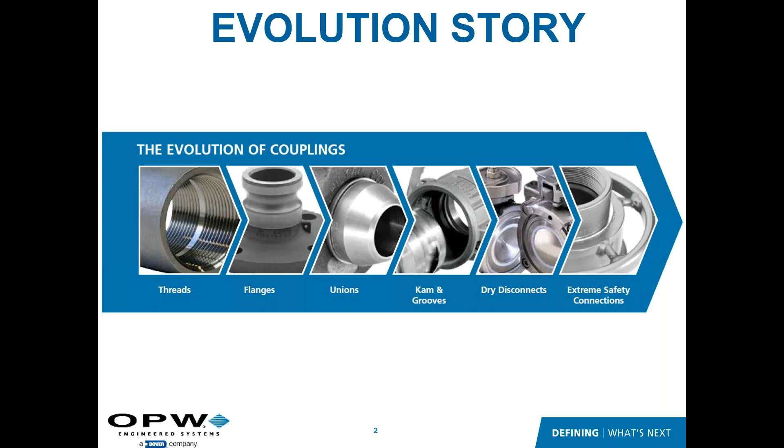So let's start at the very beginning. With threads, I mean, threads, super simple, super easy, very intuitive. Everybody knows what a thread is. It's the old righty-tighty, lefty-loosey. Used widely, these are mostly used for permanent connections, lower pressure applications. You do have torquing requirements, sealing requirements, pipe dope, Teflon tape, and things like that to get them to seal. So this really fits in where you would have a lower pressure permanent connection. But back in the day, people would literally thread up to make a connection to a tank truck or a rail car.

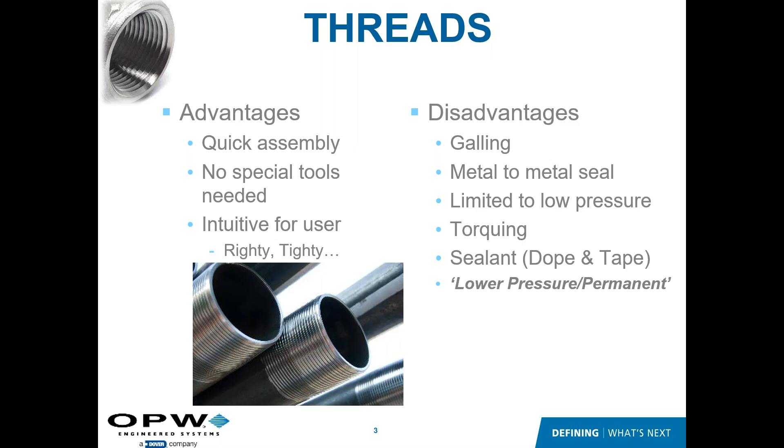So for low pressure, if people needed higher pressure, they would use a flange. Flanges really are for higher pressure permanent connections.

So in North America, we use the ANSI standards, so it would be 150, 300, 600 PSI class ratings, depending on the pressure requirements of your application.

The issue with flanges is they take a lot of time to connect. You could have 4, 6, or 8 bolt connections that take a lot of time. There's a torquing sequence, as you torque the bolts you have to do it in sequence, and there's gasketing requirements. So widely used, but mostly this would be for a higher pressure permanent connection.

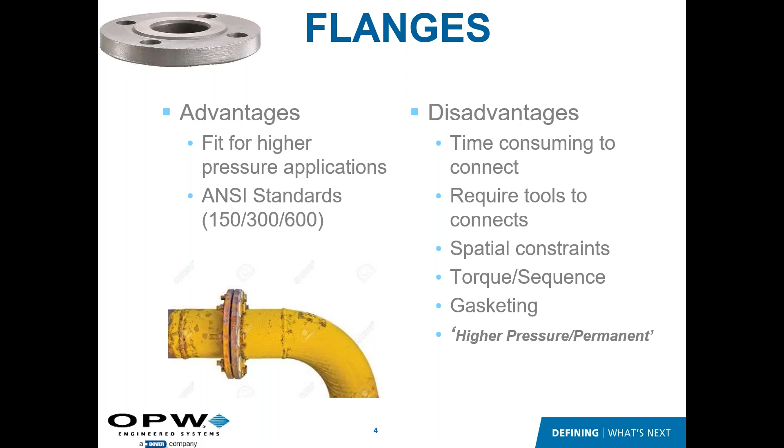So what if you're going to have repeated connections? Repeated connections would be at the loading rack. If you're loading a transport, a tote, or a tank, something you're going to have to do very often, doing a thread or a flange doesn't make a lot of sense - takes too long, takes a lot of time. You've got to follow all the sequences to get it done right.

So unions were developed. A union, like you see here in the picture, is basically a threaded connection that threads on, and when you get it threaded, there's a gasket or seal that's going to seal it up.

The disadvantage of this union, of this type of connection, is that it requires a tool. A lot of people refer to these as hammer unions, so it requires tools to get it tight. They hit it with a hammer, and when you hit it with a hammer to tighten it, it can damage the seal or gasket. So it could be something that requires a lot of maintenance and servicing over time.

So there are some better alternatives that we'll look at later in the presentation. The union is a high pressure repeatable connection.

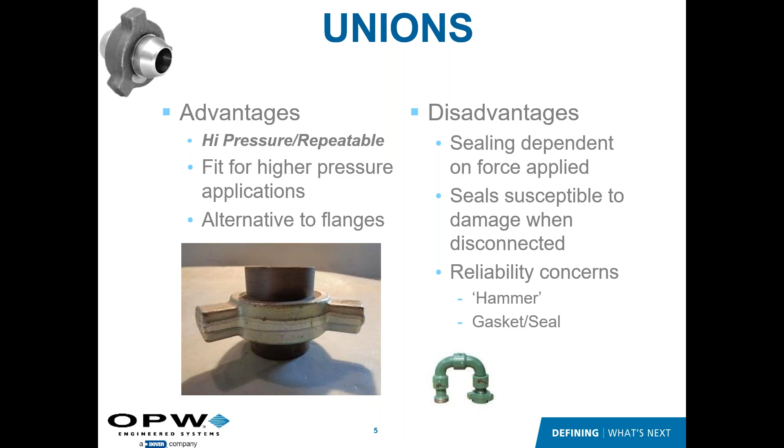The next type of connection would be a cam and groove fitting, the Kamlok. This would be used for a lower pressure repeatable connection.

OPW invented the Kamlok many years ago - I'm not sure the exact time, but it's getting close to 100 years ago. Our company started in the oil and gas business, mainly with petroleum, diesel, and different types of fuels and oils. What people wanted was, when loading transports, a quick, easy way to make the connection. So that's really where the Kamlok was born.

Today, many people make Kamloks. They're interchangeable, made to a mil spec. So Kamloks are widely used throughout industry - there are many manufacturers, and they're 100% interchangeable.

The disadvantage to a Kamlok or cam and groove connection is they're very limited. They're really designed for low pressure applications, less than 250 PSI. It is a quick connect, and a quick connect doesn't have anything that's going to keep whatever's in the line from coming out. So when you uncouple it, whatever's in the line is coming out.

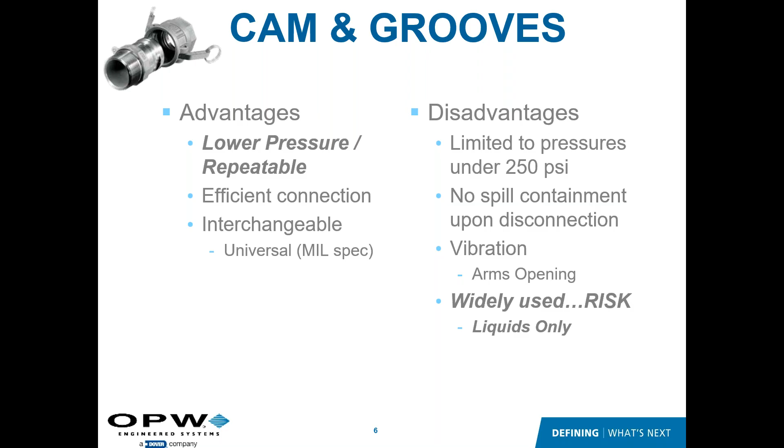So lots of people make Kamloks, but there are some differences. Just a couple of points that we do with our cam lock that make it a little bit different. It's very subtle, but it makes a big difference in the operation of the fitting.

So we have what we call our Twin-Kam, which you can see here on the arm. There's a small divot, and if you would have vibration in the line, the arm would partially open and catch in that divot, which would prevent the arm from fully opening. A cam lock without that Twin-Kam feature would fully open, whatever's in the line would come out, and you'd have a release. So the Twin-Kam is a safety feature that if you have vibration, it's going to keep that fitting from coming off. So all cam locks are not the same.

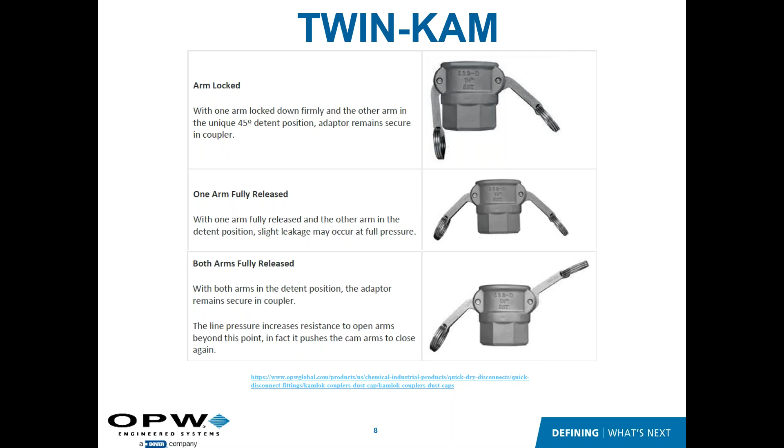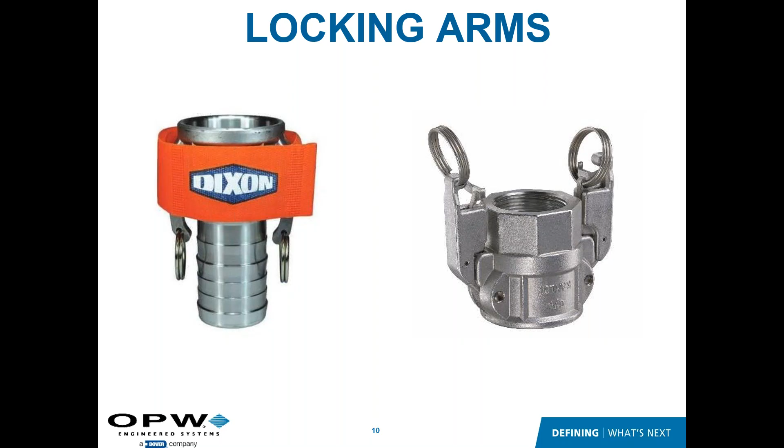So we talked a little bit about quick connects, and people use them throughout industry. That's how trucks were loaded and unloaded. They would walk out, thread up connections to get the loading done, or they would flange up to get the connection done. That is still done in some parts of the world, and even in the US you see it occasionally.

People back in the day, as industry progressed, started handling more hazardous products. It was beyond just petroleum and oils and things like that, where they don't want to get product on the ground. They want to keep it off the ground, keep it out of the atmosphere, protect their people, protect the environment. So they wanted something more.

This led to the evolution of dry disconnects. What started was people had just quick connects, and that's what you see on the left. Whatever's in the line with a quick connect is going to come out, and you're going to have that loss. So people started to combine a quick connect with a valve, putting a valve directly behind the quick connect. When they would uncouple, they would close the valve and have less drippage when they disconnected.

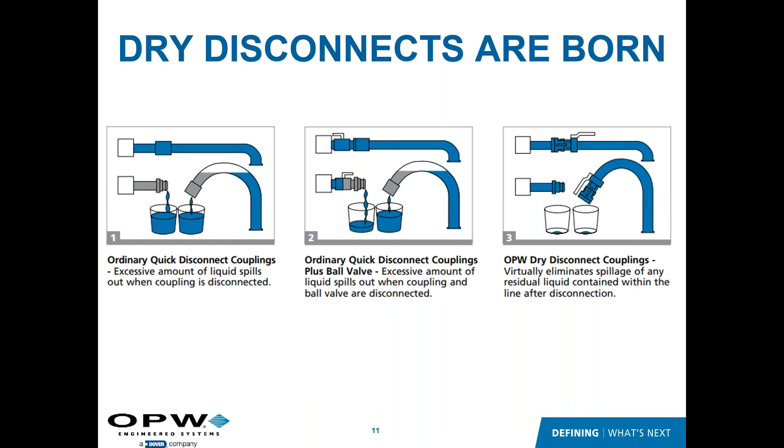What OPW did was we looked at that and said, hey, let's combine a cam and groove connection with a valve. And the KAMVALOK was born, and that's what you see here. This was really the first dry disconnect, developed about 80 years ago.

This is in 1 to 3 inch sizes. Originally it started for just fuels and oils and things like that - the petroleum roots - but it's evolved to where we do these in stainless. So 1 to 3 inch sizes, aluminum and stainless.

Standard features on this would be the twin cam on the arms, locking arms, so the arms are auto locking. And then the handle locks in the open and the closed position. So that is the KAMVALOK - it's a flagship product for us now, but that was the first dry disconnect.

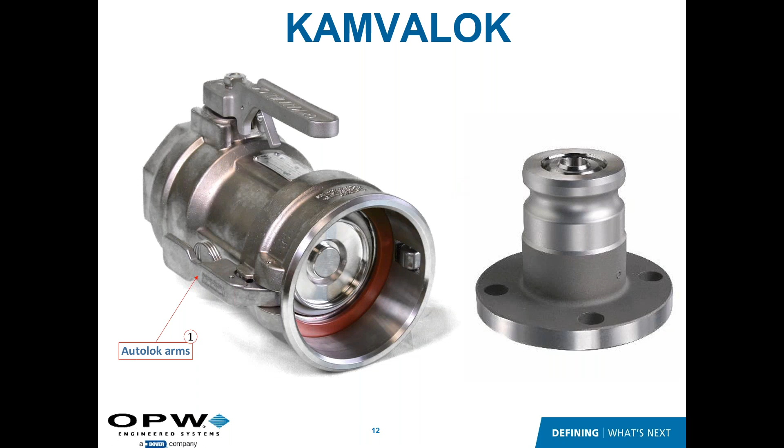And this short little snippet here kind of shows you how it works.

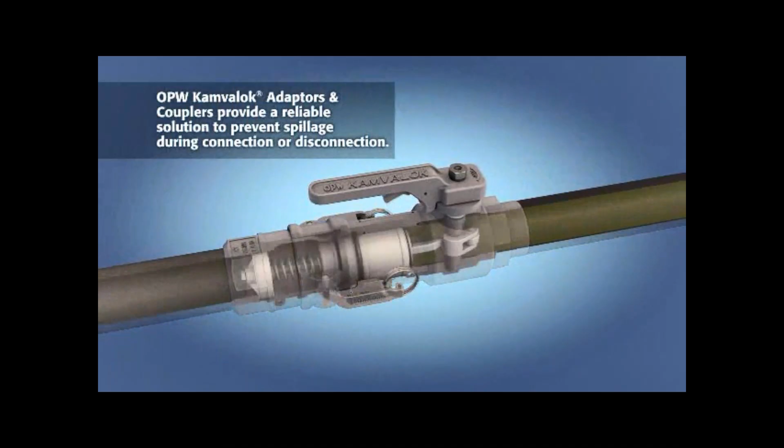So there you go, great product. Again, aluminum and stainless, and one other note here, it's a safety coupling. If you would open this coupling without it being on the adapter, it will not leak. There's a spring-loaded cylinder that would keep any product back from leaking. So it's very safe - the only way to get product out of this is to have it on a mating adapter.

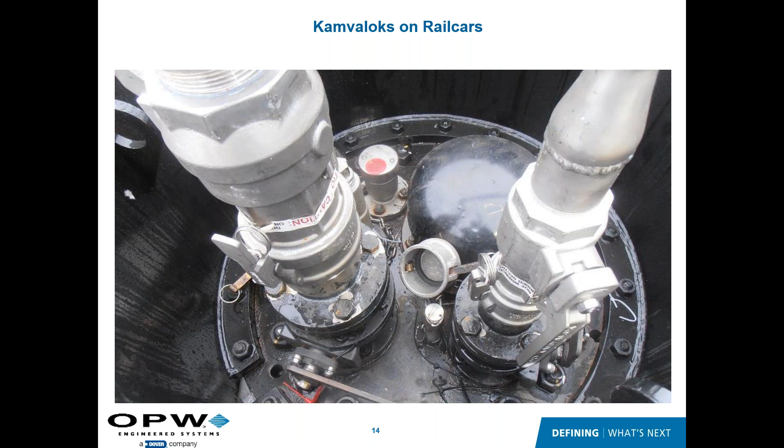So the KAMVALOK was the first. And what people wanted, as industry evolved, there was more heavy chemical. There's a couple of pictures of KAMVALOKs in use, KAMVALOKs on rail cars. A lot of these live on rail cars, and it's how a lot of rail cars and tank trucks are loaded and unloaded - through KAMVALOKs.

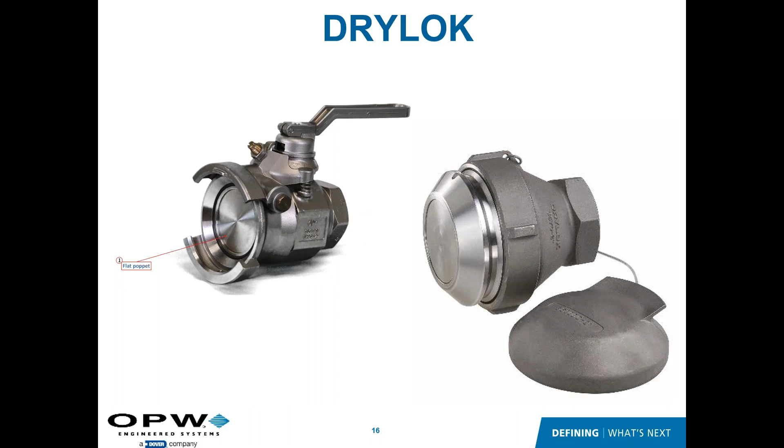As the industry evolved, people wanted more. They started using more hazardous, more corrosive products. With dry disconnects, there's normally a concern with flow—they want better flow and less drippage. With the KAMVALOK, you will get some drippage, and as you get into heavier chemicals, drippage becomes more of an issue.

The DRYLOK was developed to address the flow and drippage issues. You can see in the pictures how we did that with the flat poppets, which give very little place for product to collect and hide, so when you uncouple you have very little drippage. The bell-shaped adapter and body also give much better flow characteristics through the coupling. So the DRYLOK was born to give better flow and less drippage.

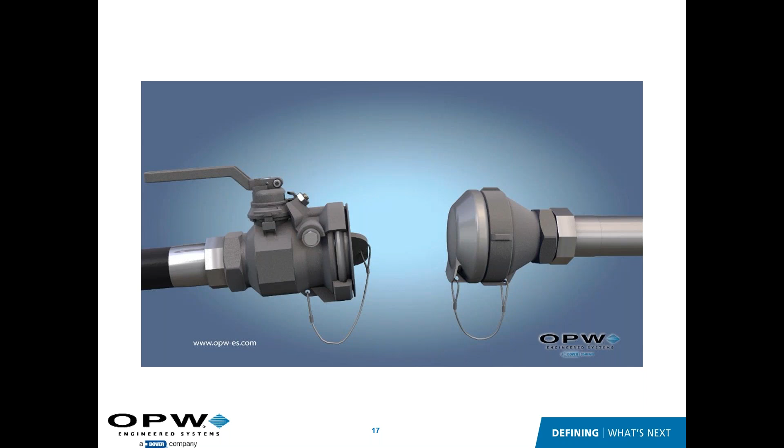The other difference is it's more for heavy chemical use. We do both stainless steel and Hastelloy, so with more aggressive, more corrosive fluids, the DRYLOK is a great solution. This will show you how the DRYLOK works.

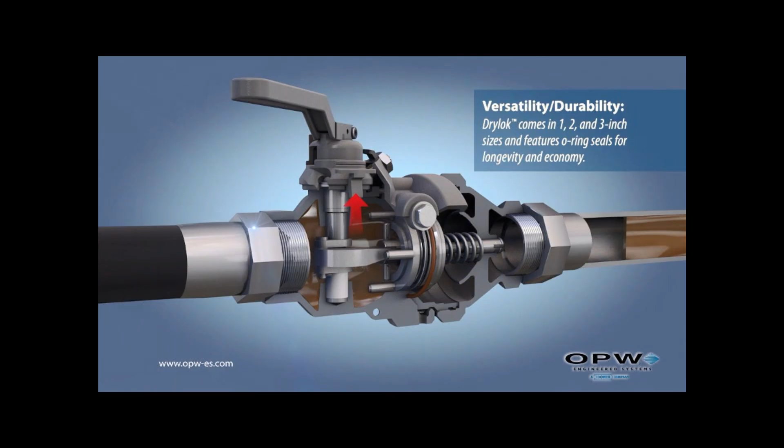So there's the DRYLOK. Again, super safe—you can see through the video the handle is locked. It has safety interlocks to open and close; if it's not on a mating adapter, you cannot open it. So very safe.

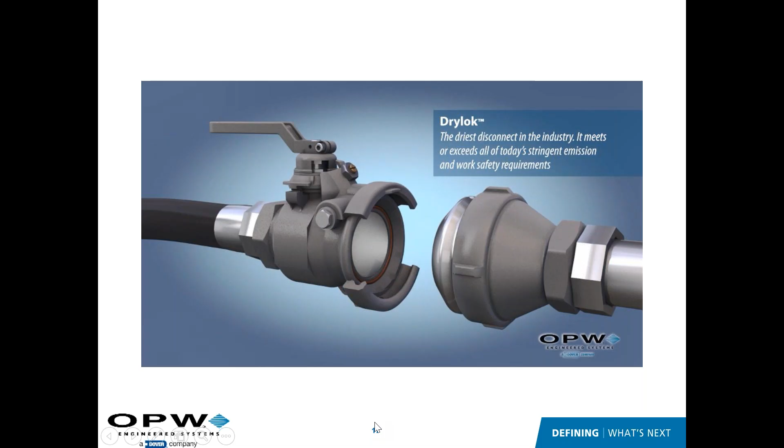Again, just like with the KAMVALOK, there are a lot of applications where these live on rail cars. What you see here is butadiene. A lot of butadiene cars out there are standard, where the cars are outfitted with the adapters, and when they load them, they've got the arms with the DRYLOK couplers. So it's widely used—this product has really become the loading rack dry disconnect. It's very rugged and durable, holding up really well for heavy chemical use at the load rack.

Another type of dry disconnect is our Twist-Lok. There are many manufacturers of this product. It's based on a NATO standard, widely used throughout Europe, so lots of manufacturers make it. TODO is probably the most well-recognized brand for this type of product. They're all interchangeable, just like with KAMVALOKs—any manufacturer of a NATO style coupling can interchange, including our Twist-Lok.

Where this fits in for us is in higher pressure applications, because most dry disconnects are limited to 150 psi—the KAMVALOK, the DRYLOK, they top out at 150. There are some applications that need up to 360. The biggest ones we see would be LP gas, LPG, and ammonia. So when you get into pressure railcar loading applications, this is a great solution, giving us that much higher pressure rating.

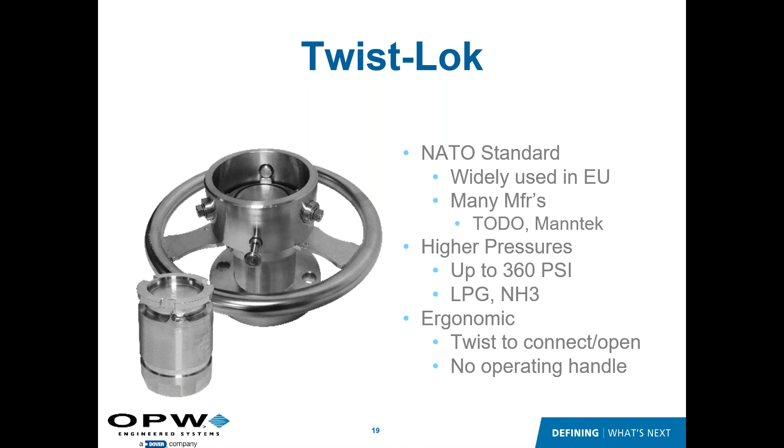This video shows you how this operates. As it goes onto the adapter, you twist it, and the twisting action drives the poppets to close, to open and close. So there you go—pretty slick.

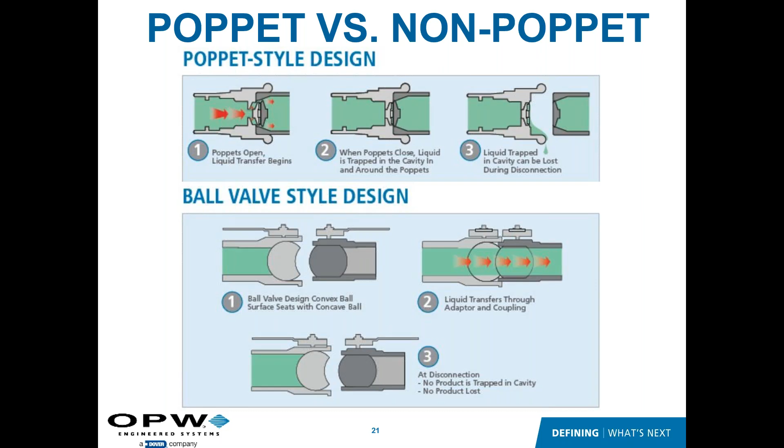That's a lot of the applications we look at for Epsilon, or this non-poppeted version. Flow is very important, and also product loss, because it virtually has zero product loss at disconnect.

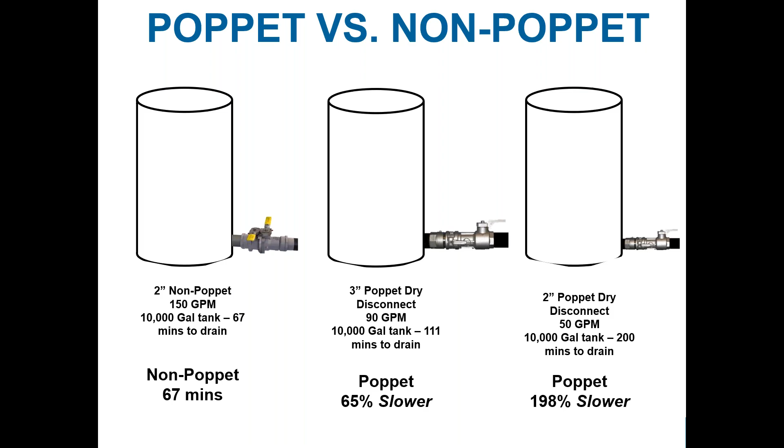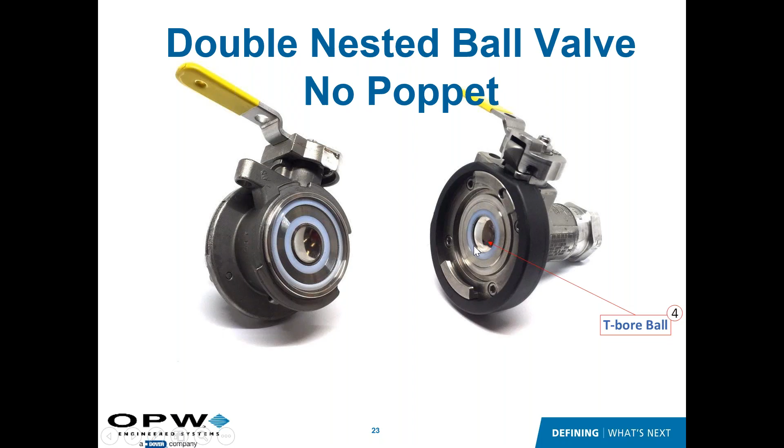So this is what this product looks like. Again, it's a double ball valve on both sides. One has a concave ball, the other has a convex ball. So when you put them together, they nest. Once it's together and you open the balls, you'll have that clear flow through the unit with uninterrupted flow. So virtually no pressure drop, virtually no drippage at disconnect. This kind of shows you what that looks like.

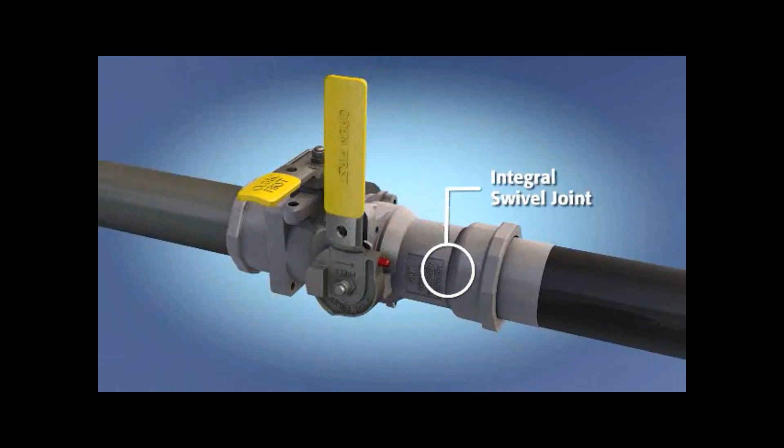All right, so that's a non-poppeted dry disconnect. We call that our Epsilon. Really cool product. We've really grown. A lot of our customers are really looking at flow.

The other thing that's really important to people is product loss. So people are really looking at how much product do I lose per connection. If you think about a plant with hundreds and thousands of connections, and you lose a little bit with every connection, it adds up over time. So we work a lot with companies that have high value fluids. If you're losing a drop, you're losing money.

So what you see here is some Epsilons on tank trucks. We do some on transports, but this product's more common in plant, in process, where they're making a lot of repeated connections throughout the process. So a lot of pharma applications, a lot of high value fluid applications. That's where this product fits.

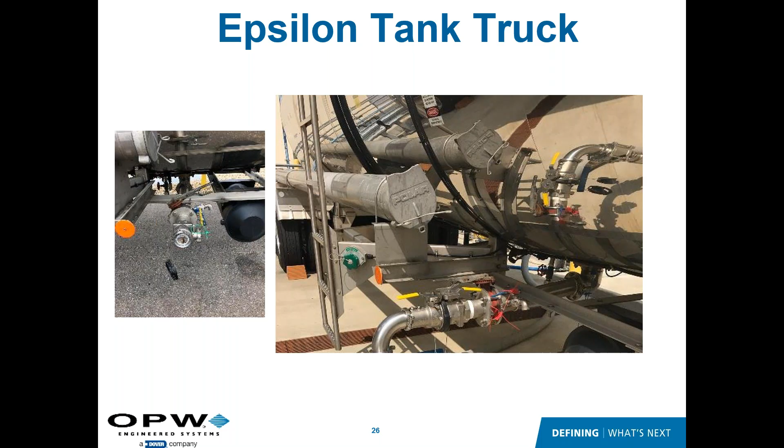So there's a lot of different types of dry disconnects. We just ran through the most common types that we see in the market here in North America. A lot of people get confused with, okay, where does this fit? Where do I use this product versus this product versus this product? We try to do studies on where people use a KAMVALOK type product, where people use Epsilon type products.

What we found is that it's hard to put things into buckets, because the things that are important to one plant or one operation could be different than in another plant or operation. So for one plant, flow could be super critical, so they would look more at Epsilon or a DRYLOK where they're going to get better flow. For another plant, flow really doesn't mean anything, so to them the KAMVALOK could be fine.

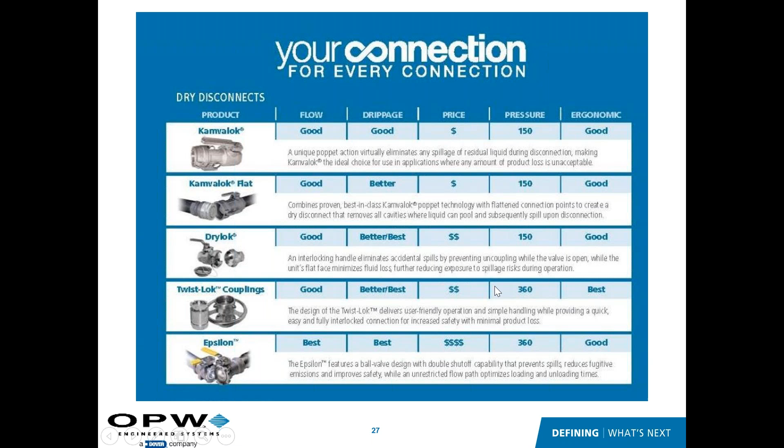So we put together a little cheat sheet to help people understand where these fit. The things that we look at are flow, drippage, the price (because the price does vary), pressure, and ergonomics. In general, the way it works is the flow performance improves, kind of a good, better, best scenario. As the drippage performance improves, or dripping less, again good, better, best. As you step up in class, the price point steps up as well. You can see that here. Outside of that, the other point would be pressure, so sometimes pressure is going to point you to what type of connection you need. So it's a good little cheat sheet on where everything fits.

So connections are everywhere. We deal with all types of fluids, and it's really important to think about what type of fluid it is, what are the hazards of that fluid, what is the value of that fluid, the pressures you could see, the temperatures of both the product and the environment. The temperature in northern climates can play a big role in what coupling you're going to use and what seals you're going to use within that coupling. And then the flow.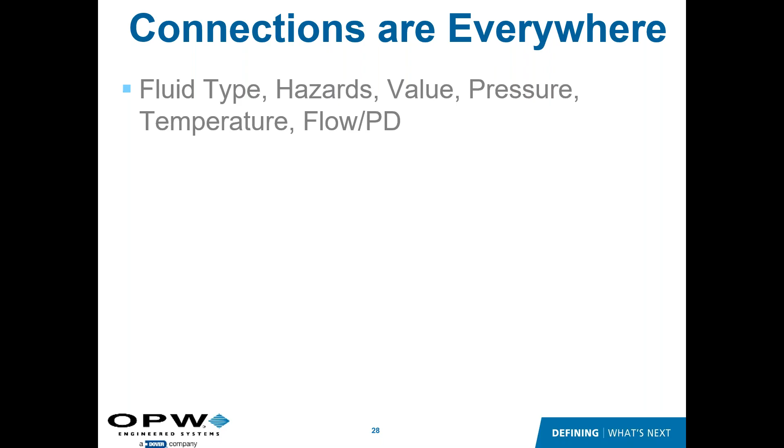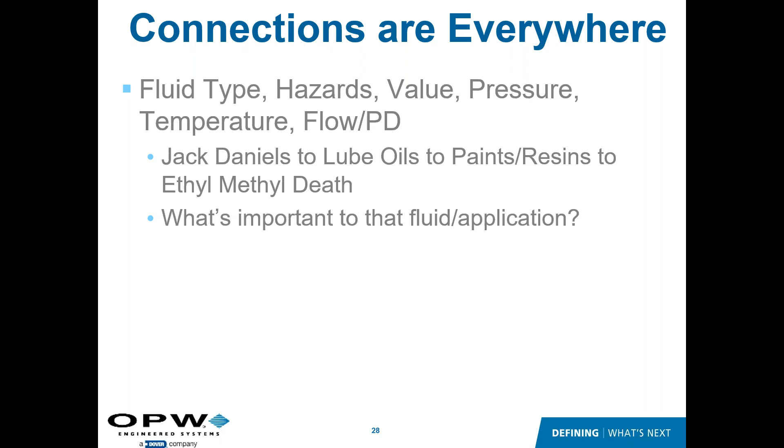How important is flow or pressure drop to that application? We see everything when we move fluids - it's everything from Jack Daniels, and we're proud to say every drop of Jack Daniels goes through a KAMVALOK and an OPW loading arm, to lube oils, paints and resins, ethyl methyl ketone, and everything in between. It's important to think about that fluid and application and what's important to it, and it's going to vary. There's a lot of different types of units you can use depending on what's important to that application and fluid.

In general, what we want to do is keep product in the pipe. A lot of systems early on, and you still see a lot of plants today, are open - meaning open connections, like CAMLOKs. What we're trying to do is move people toward closed systems. Even if you clean out a line or blow it down, you still have residual product left in that pipe, and if it's an open connection, you're going to have emissions. So we want to keep the product in the pipe.

The other thing to think about is where people meet pipe. If you think about a plant or operation, one of the highest risk areas is where your operator has to make a connection - where people meet pipe. Permanent connections back in the process are pretty safe; they're in place for many years, not a lot of risk. Where there's risk is where you're making repeated connections that a person has to make. So it's important to think about that person and where they meet the pipe.

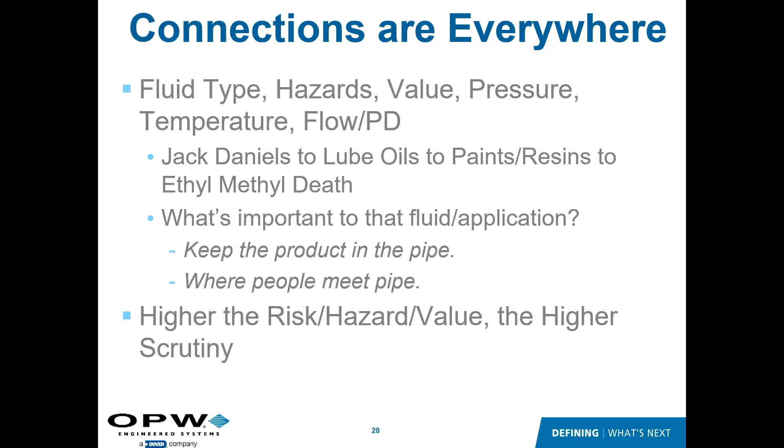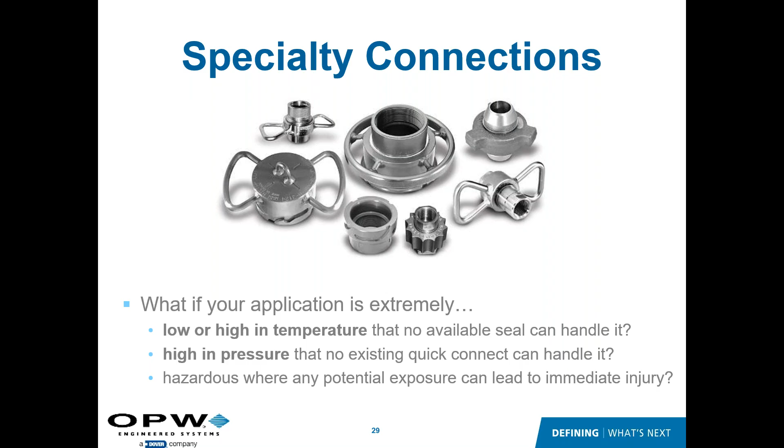Just wanted to have a few more slides here, touching on some specialty connections. The specialty really comes in the form of extreme temperatures and extreme pressures, both low and high, and there's fittings designed to handle those types of situations.

The first is for extreme temperatures - both high temperature, where the problem is seals used in most couplings would melt and not handle it, and low temperatures, where those seals would get very hard and not seal. So if it's a cryogenic type product, or an environment that's very cold, the seals would just get rigid and not seal. That's why there's a metal-to-metal type seal, as you see here.

The principle is it looks like a threaded union. As you thread this on, you drive this metal wedge into the adapter, and the primary seal is a metal-to-metal wedge seal. So it's impervious to temperature and pressure - good for really high pressures, really high temperatures, and really low temperatures.

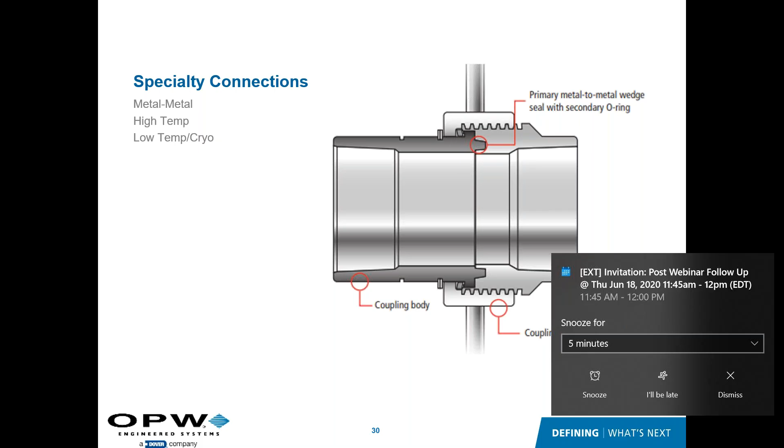So we have a little snippet here to show you what that looks like.

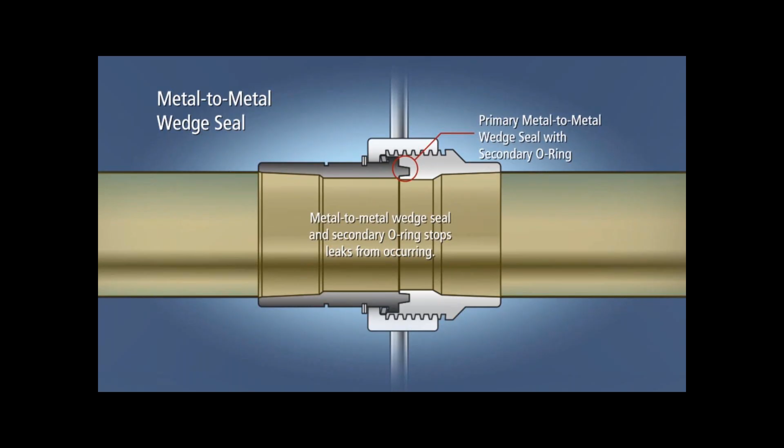So that's a metal-to-metal wedge seal. That would be our 3TL, as we call it.

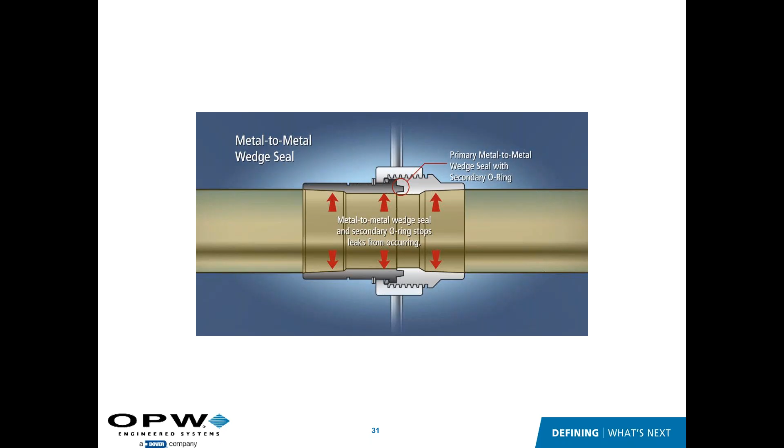The next thing I wanted you to think about is, we talked about cam locks and cam-and-groove connections that are used widely - they're everywhere throughout industry. The one thing to think about when making that connection, again that 'where people meet pipe' thing, is when you make that disconnection, especially with a quick connect like a cam and groove - is there pressure in the line, and what happens if there is? I wanted to show you a scenario of what that might look like.

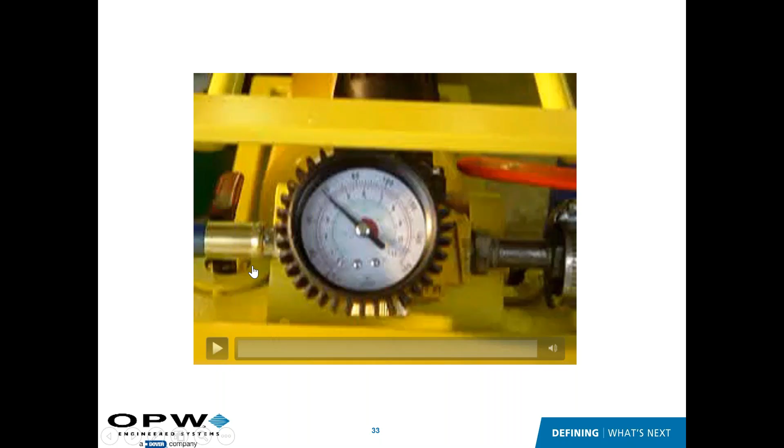So what you're going to see here is a little video, just a quick snippet. This is a line that has 60 psi on it with a cam-and-groove cap. This would simulate if you're in a plant with a cap and there would be pressure on it. Obviously normally you wouldn't have a pressure gauge showing you, hey, there's pressure here, don't open me. But what happens if you would remove that cap with pressure?

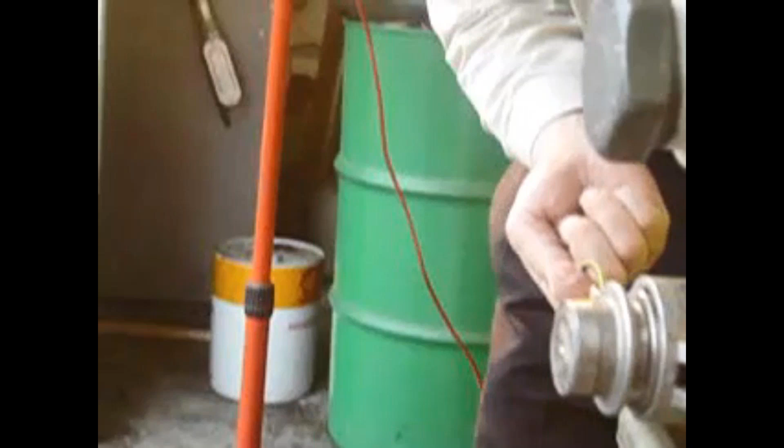So yeah, that's not great. And if there were fluid in the line, obviously to have a release like that, you could have somebody potentially injured.

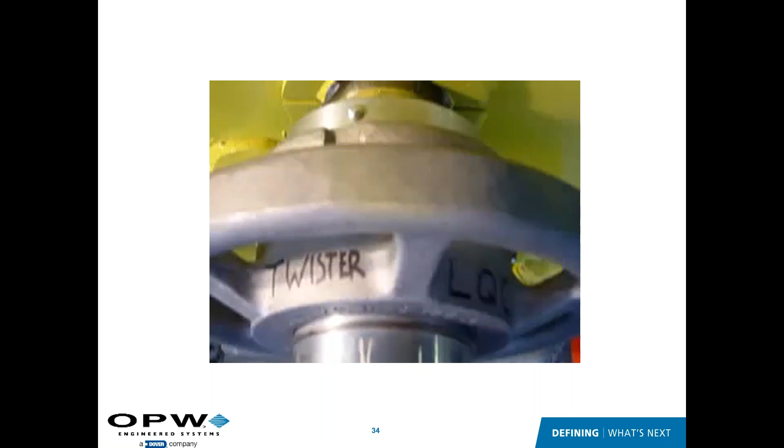So we developed a product to address that. People came to us with this very issue and said, hey, can you fix this? So we developed a product we call our locking quick coupler, or LQC. What you'll see here in this video is the exact same scenario, 60 psi in the line, and if you try to remove it under pressure, you can see what happens.

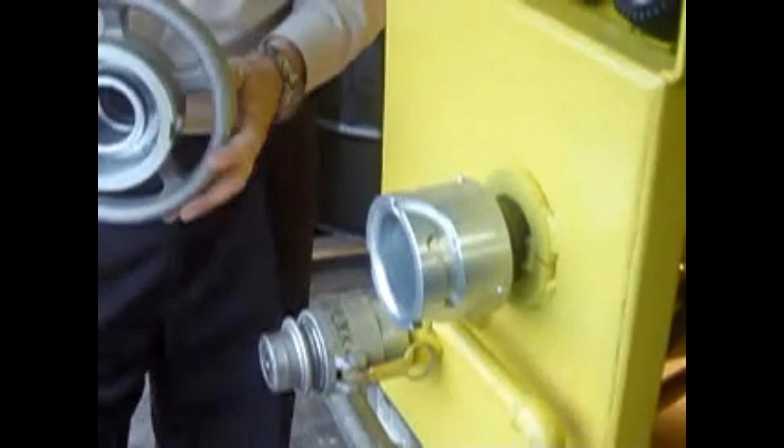So you can see with the pressure, it catches. You can kind of see it here in the video picture. There's a little divot that if there's pressure in the line, it's going to catch in that divot, and you will not be able to get it off. You can hear it catch in the video where it catches in that groove. With no pressure, it just bypasses the divot and it comes right off. So very safe.

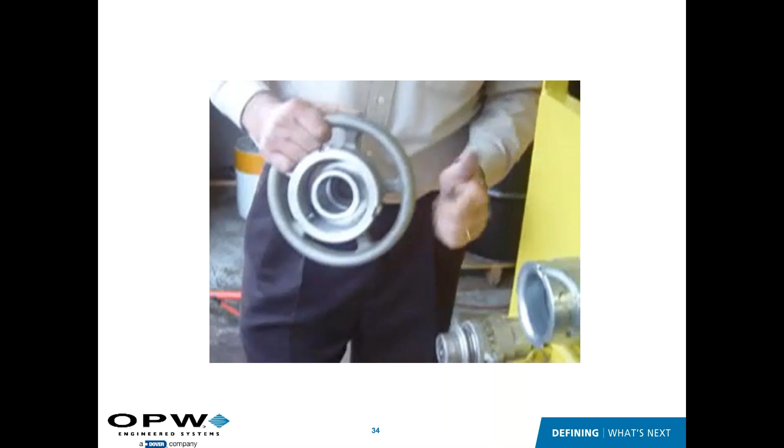Very safe product, super cool. We call that our LQC, and it really was designed as a safer alternative to cam and groove. Cam and grooves are used in a lot of places, probably places where they shouldn't be used, in those more hazardous applications. This could be a really good alternative. For those older people in the crowd, yours truly included, it's basically like a radiator cap - if there's pressure, it's not coming off. So super safe.

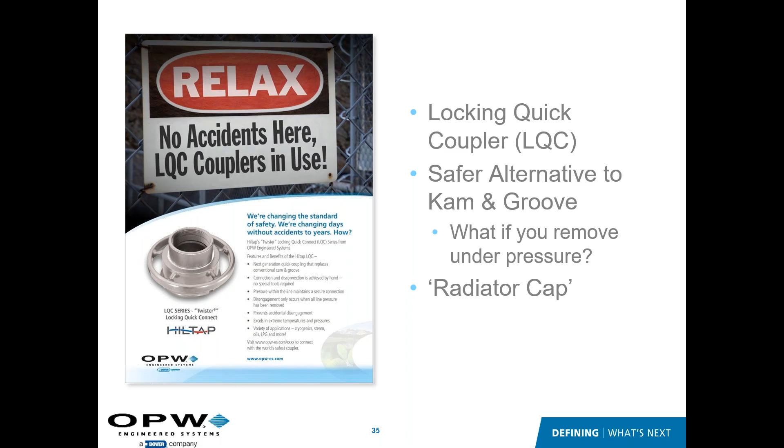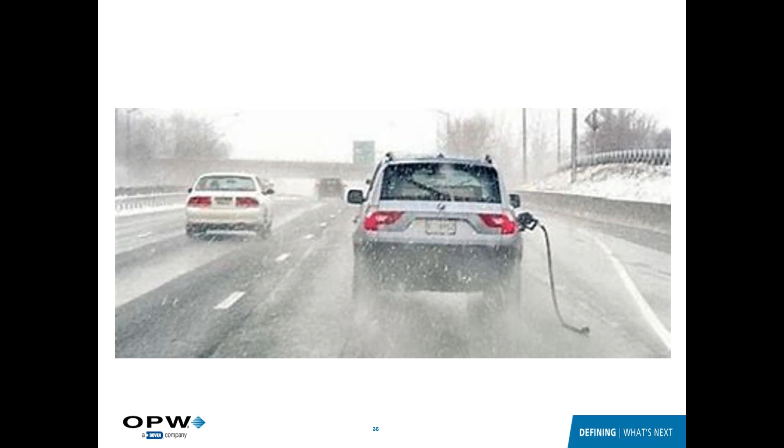That's become standard in the industry to prevent this. So if someone is fueling and connected, and they decide to jump in the car and drive off, it's going to pop off and be safe. In our world, in the chemical plants, refineries, and places like that, there's not a lot of this going on. They're not widely used today, but it's something that is becoming more common.

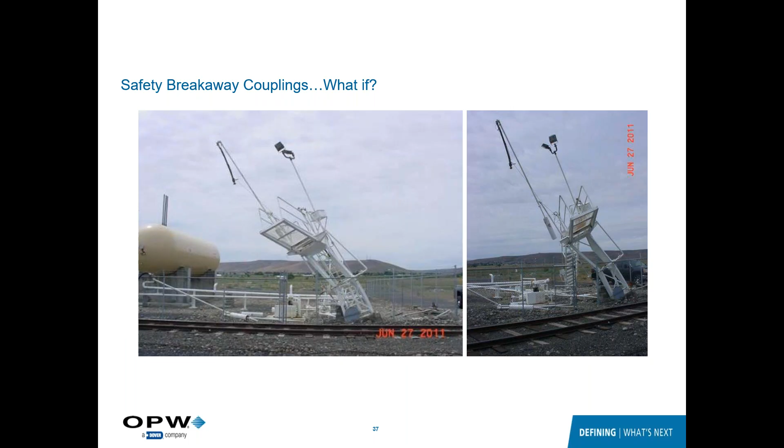So one thing that's becoming much more common in the chemical petrochem world are safety breakaways designed for chemicals, petroleums, LP gas that would be incorporated into the loading lines. You can see here, this is an LP gas loading arm, and at the top of the hose, just like you'd see in a retail fueling situation at the gas station, there's a breakaway. So if that car would be pulled away, it's spring loaded, pops on both sides, and would pop off and be safe. So it protects the equipment, protects the environment, the people.

Still not widely used yet, but it's one of those things that we think, over the next 5 to 10 years, it'll be much more common to see this in these types of applications.

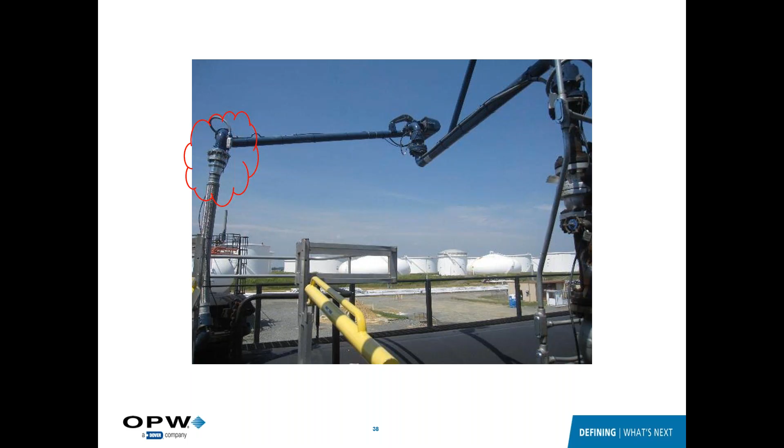So we'll kind of wrap up with just a few final thoughts. We went through a lot of different connections. The reality is a bad connection is bad - it can be bad for the environment, bad for your people, and bad for your bottom line. So wanted to share some data just around this.

The EPA publishes the LDAR report, which is a leak detection and repair report. You can download this on Google, and it talks all about how much emissions and how much product loss there is in a plant - big numbers. Their data says there's over 70,000 tons per year of VOCs that are emitted from leaks within a plant.

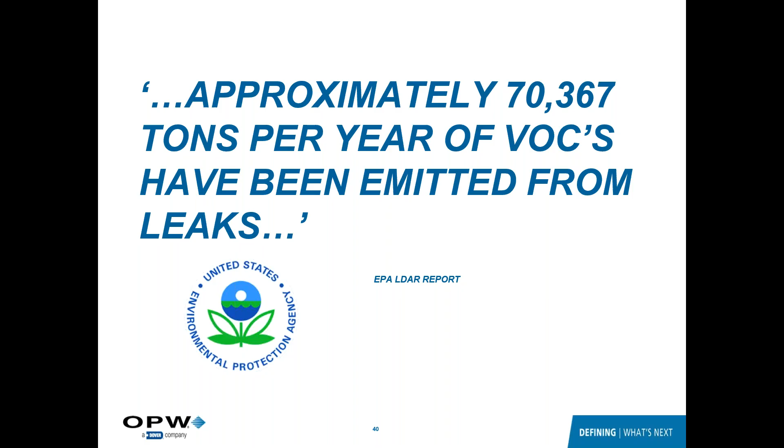So where do those leaks come from? Where do we see those VOCs? Again, the LDAR data says that a big percentage of that leakage, of that loss, is coming from connections and coming from open-ended lines. The more recent data on open-ended lines shows it's more like 10%. So you take 5 to 10% of that plus the 31% from connections, it's approaching 50%. So a lot of the emissions in a plant are coming from the connections within a plant.

So there's lots of opportunities to reduce emissions and keep your people safe, keeping the environment safe. Connections play a big part of that.

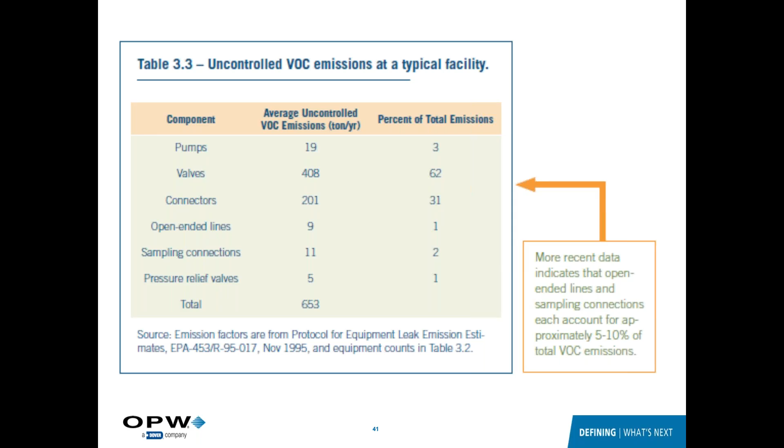And then just some dollars around that. If you lose vapor or you lose product, that loss eventually is going to mean loss in revenue. Again, this is the EPA LDAR data - almost $730,000 per year per plant is what they estimate the loss of revenue is through product loss.

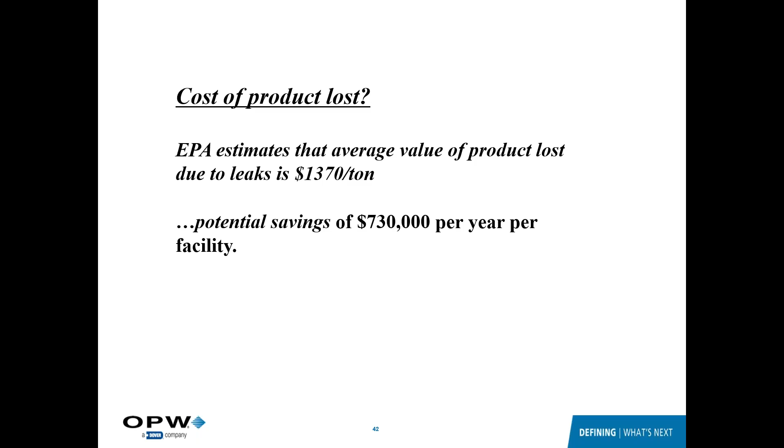When we talk about connections, it's a target-rich environment. There's lots of connections—connections are everywhere. These numbers are the average number of connections in a typical refinery or plant: over 12,000 connections and approaching 600 open-ended lines.

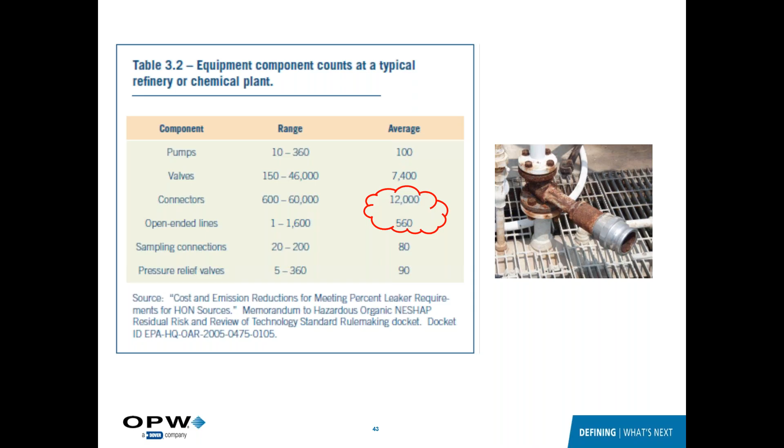An open-ended line is what you see here—a cam and groove type line that's open to atmosphere. These are the opportunities to possibly reduce emissions, saving money and keeping your people safe. So lots of opportunities to improve.